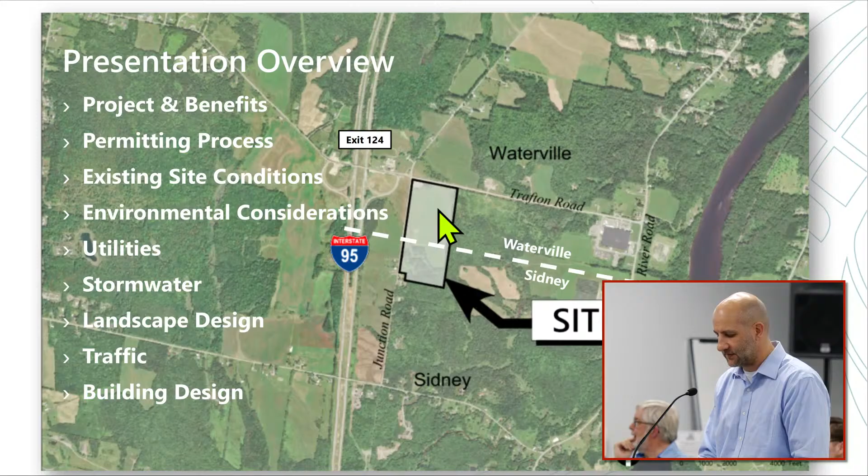The presentation tonight covers a number of things: project benefits and overview, the permitting process—so you can see where we're at, since this isn't the only permit for the project, there are quite a few—existing site conditions, environmental considerations, utilities, stormwater design, landscape design, traffic, and the building.

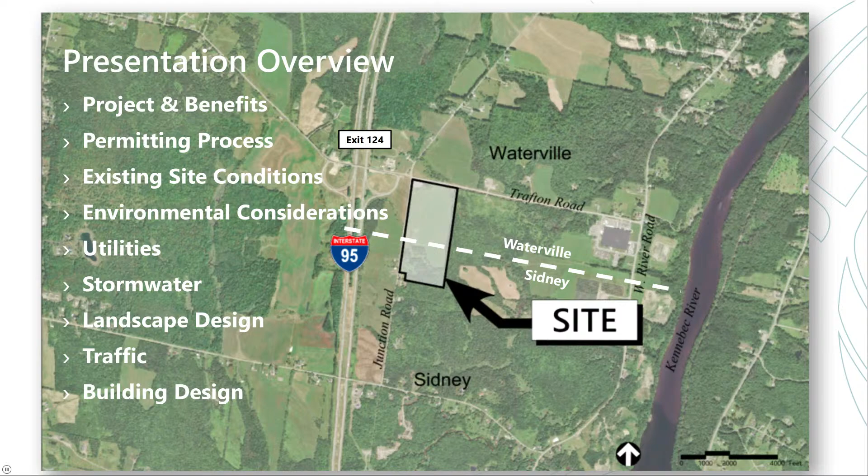They come via 95, entering this facility immediately at the interchange at 124, coming down Trafton Road onto Junction and into the green driveway on the north side of the facility. That green driveway provides access to 20 truck spaces on the back side of the facility, 15 of which are loading docks. There's also an employee parking lot shown in blue.

The pink area to the south of the facility is where the vans that deliver product will be parked, queuing and loading at the south edge of the building. That south edge has a canopy over the top to allow product to come in and be distributed out under cover. The facility is located right at exit 124, and we're targeting a 2027 opening date.

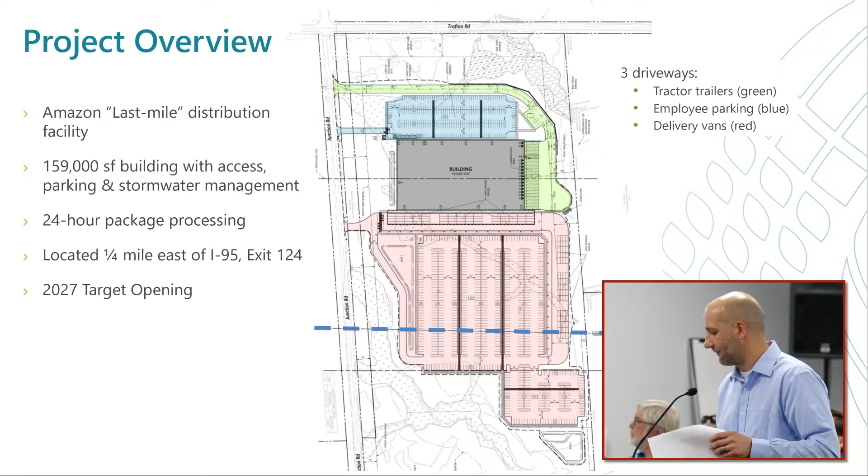Some aspects of the project: this is a site that's been zoned this way for quite some time with the intention and desire to have industrial use. It meets that category in the commercial district zone. The idea behind some of the investment at Exit 124 and the zoning of these parcels back in the late 80s was to promote this type of development. It's been under that zone since 1987.

In 2018, the interchange on 95 was put in to further promote the exact connection to the interstate. The project will support approximately 150 to 200 full and part-time jobs, and certainly provides expansion to the local tax base, providing municipal tax revenue.

Some infrastructure enhancements as part of the project, even though it's not an aspect of the traffic movement permit - the desire we've heard from folks both here in the Waterville process and in the Sidney process was not just to pave a little bit of Junction Road, but to pave the whole length into Sidney. So from Trafton Road all the way down to Town Farm Road, the project will pave that to improve that connection. There's also an extension of water along Trafton Road and three-phase power. I'll show you that in a moment.

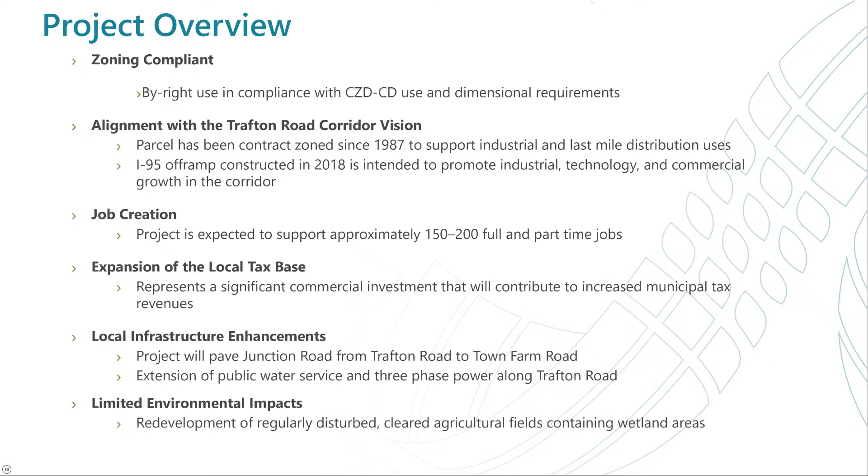As far as environmental impacts, we've really focused the development in an area of developed field, and I'll show you that in more detail, so that we limited any areas that haven't been previously disturbed. We really focused it on the field area that is regularly cultivated.

As for the permitting process, we are in front of you tonight for final review. Sidney has a review coming up on the 15th for their final review process. This project requires we go in front of the Maine DEP for site location of development, since it's over 3 acres of impervious area. We made that application on April 24th, and it was accepted by the DEP for processing on May 15th.

As part of that, there's a Natural Resources Protection Act, and ultimately there's also what they call the Maine Construction General Permit that we'll be going through as part of the erosion and sediment control and contractor requirements for the site. Because of the wetland impacts, we also have an Army Corps of Engineers component, so an individual permit went into the Corps. That's being processed as well, typically a simultaneous review with the DEP.

They've attended those meetings jointly, the DEP and the Corps together, to look at this, and they've also met us in the field to do wetlands evaluation certification.

And then there's a traffic movement permit. Of course, this project does generate traffic, and it has a permit that was submitted to the DOT. A scoping meeting was held on May 26th. We're going through that process right now with the DOT and hope to get that permit issued in the coming couple weeks. Building permits would be a future phase, probably Q3 of this year.

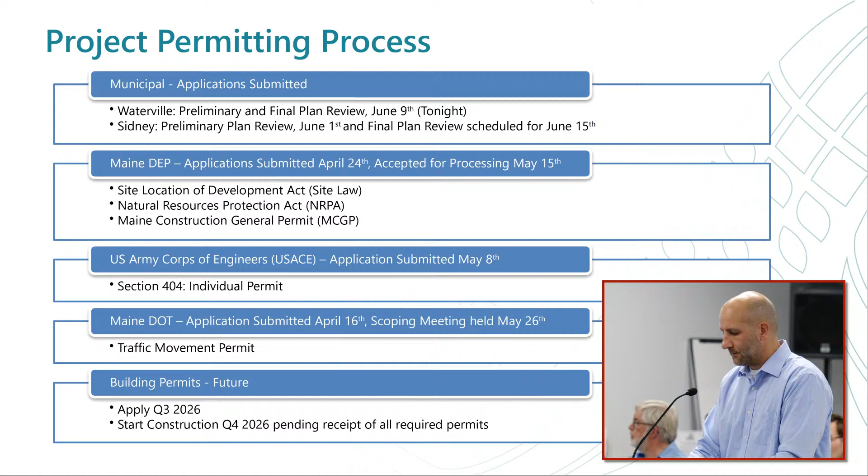As a site overview, it's approximately a 47-acre parcel that straddles the Sidney-Waterville line at the corner of Junction Road and Trafton Road. In Waterville, it's the contract zoning district, commercial district zone. In Sidney, it's the general district. Both allow this type of use that has been proposed on those parcels in those towns.

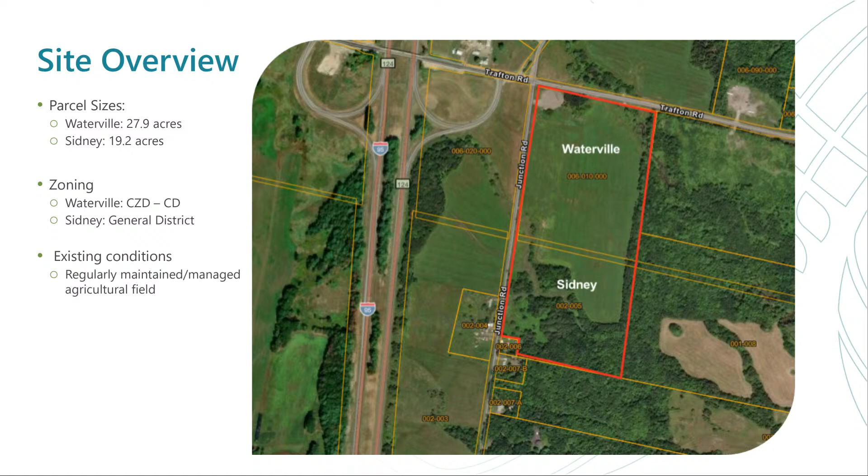As for existing conditions, like I mentioned, it's a regularly maintained field. It's important to recognize that the development has been almost entirely focused on the area that's been previously cleared, so there's very little clearing associated with this.

As for site layout, I already talked a little bit about how the site functions. We went through the Waterville requirements for both use and dimensional requirements, and it meets all of those. It far exceeds most of those dimensional requirements, so all of them are met and exceeded.

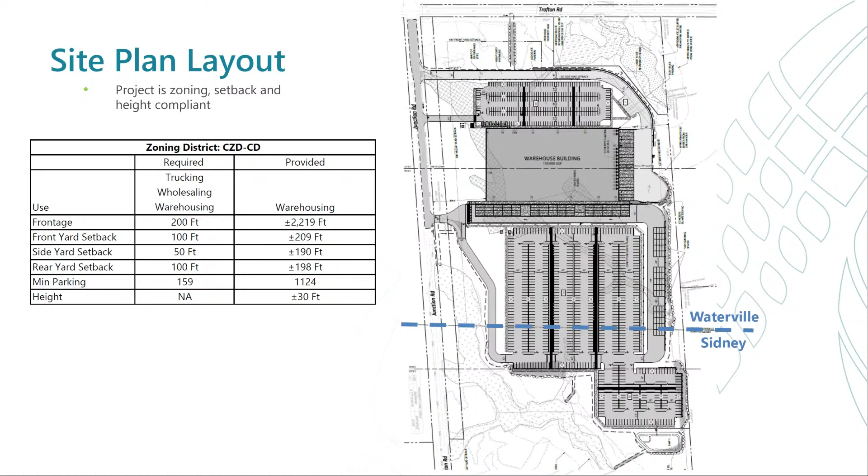Those streams we have largely avoided, staying out of their DEP required setbacks for the northeast corner, wetlands of special significance area. We're fully outside of that zone for our impacts.

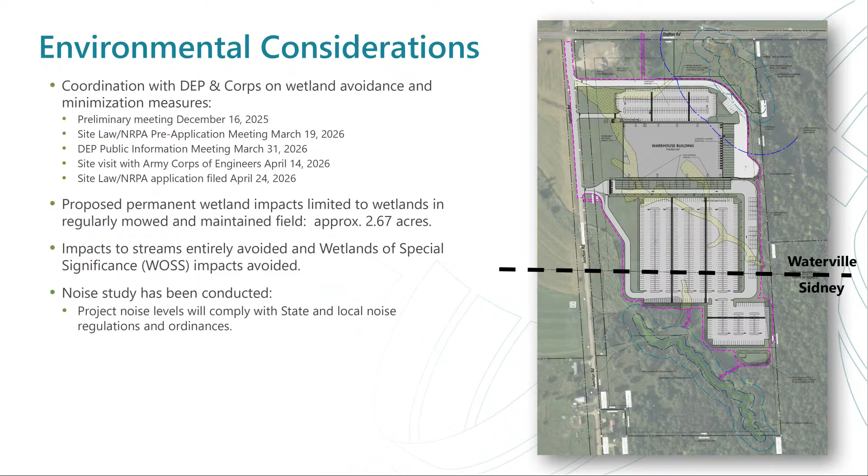The areas we do impact, 2.67 acres of wetland fill, are meadow wetlands within that cultivated field. For somebody like myself, it'd be hard to even tell the difference between that and the areas of grass. It really comes down to the hydric soils and the nature of the plants that wetland scientists are able to determine with the Corps and DEP.

But there are wetland impacts noted within that field area, and compensatory mitigation will be part of that. An in-lieu fee payment will be made by Amazon to the Department of Inland Fisheries and Wildlife, to be used for future wetland creation in other areas.

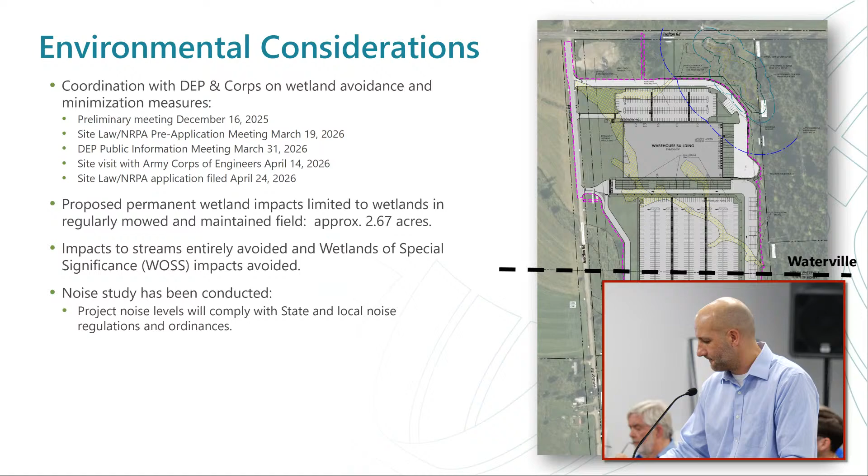Moving to the next slide, utilities: there is a public water extension that will service both this project and other projects that may choose to take public water along Trafton Road. That's 3,100 feet of new water main, probably a 12-inch line.

We've been coordinating that and will work through the process of installing that line and coordinating with the DOT on Trafton Road. Central Maine Power will be extending three-phase power, which is currently just single-phase in this area. That three-phase power will come from the West River Road area, where it currently terminates, and extend 4,200 feet up to Junction Road and then down Junction Road to service the facility.

For natural gas, we'd be taking a service from Summit Natural Gas, which is right there on Trafton Road. Telecommunication extensions will just be provided by the carriers on that CMP infrastructure.

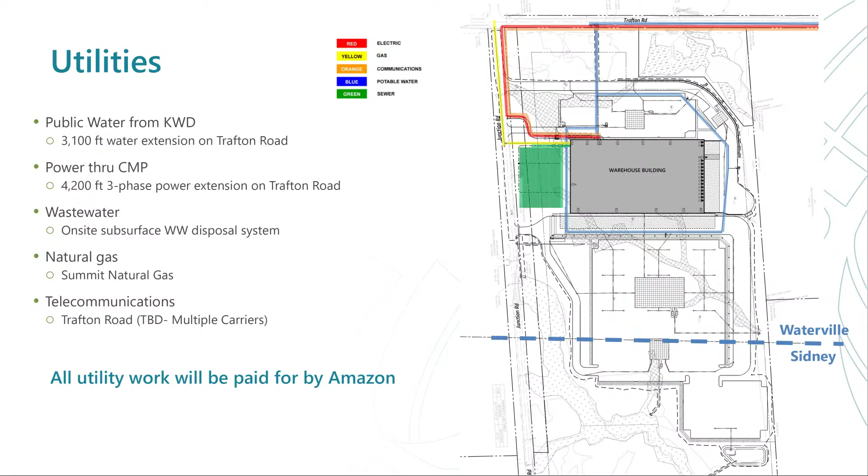Stormwater, which is an incredibly important aspect of a site like this, needs to be managed under the DEP's strictest standards for site law, Chapter 500. This includes the basic, general, and flooding standards. Basic standards are erosion and sediment controls, and general standards are the finished water quality.

Once the facility is in service, how are you treating the water over its lifetime to make sure that water quality meets the DEP's thresholds? Then there's a flooding standard, meaning in the post-development condition, the water sent off the site can't exceed the pre-development condition under various design storms—the 2, 10, and 25-year, 24-hour storms.

To manage that on a facility like this, you need some form of detention, and we're doing water quality filters on each detention area. What you see in blue: there are a couple north of the building, one large one in the middle, and another blue area to the south. Those are subsurface storage facilities below the pavement. Following those, water goes through a water quality filter and then out to the resource. One surface feature we have is an under-drained soil filter on the very south portion of the site, which I'll show you in a moment.

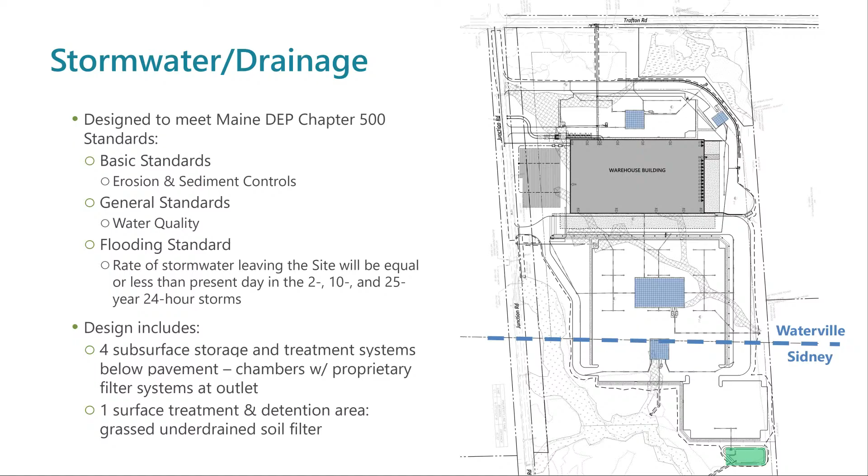So we have a strategy that looks at the hydrology across the site in the existing condition, asking where the water flows over the land right now. We want the water flow in the pre-development condition to match the post-development condition. So we've broken this up looking at the natural condition—there are 3 drainage points at the property line.

The drainage point in the northeast corner is again at that beaver impoundment. In the central area on the east side of the site, it's from those field wetlands heading to the property line, and that converges just off page with drainage point 1, and then eventually down to drainage point 3, which is the stream on the south.

We've matched more or less the same contributing area in each of those 3 locations for our discharge points, so that in the 2, 10, and 25-year storm, we end up with a near or lower peak flow condition. So we're always lower than the pre-development condition, but we also maintain the hydrology. In other words, we're not just sending all the water to one spot and not to another.

The other thing to consider is that soil filter on the southern portion of the site in Sidney, just below the parking lot. That's about a 2-foot depression, and I put a similar picture right there. We do have a chain link fence that is at the base of the facility there, but it's not a wet pond. It's mostly dry, and it's only a couple feet shallow, so it's not so much of a concern for exposure from that perspective.

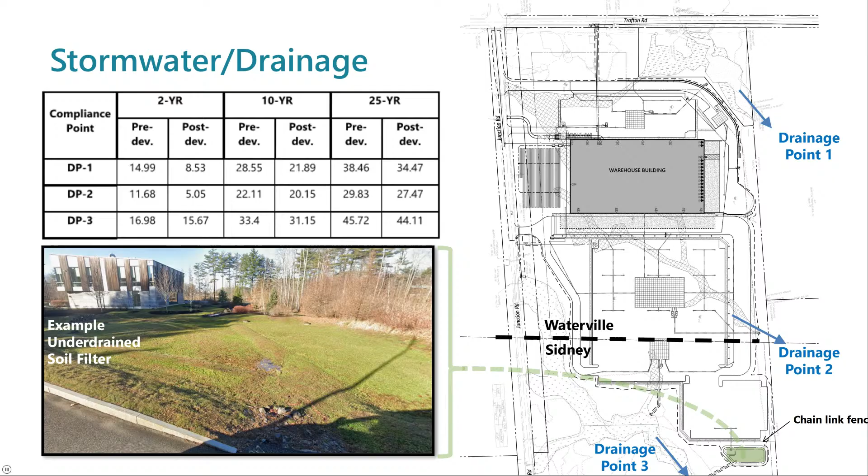Landscape design, we've got a mix of trees that we're proposing, up to 100-plus trees along that frontage of Junction Road, and then trying to maintain the existing trees that line Trafton Road. There's a tree stand up there between Trafton and the facility. And then on the south, there's wetlands and some trees, and it continues this. We didn't have more survey below that, but basically, we're going to have trees along the edge.

We did hear a concern about having certain species of oak that have some susceptibility to infestation, so we've changed those out to disease-resistant American elm and a black tupelo species of plants or trees in lieu of those oak, per the request of the board in a previous meeting.

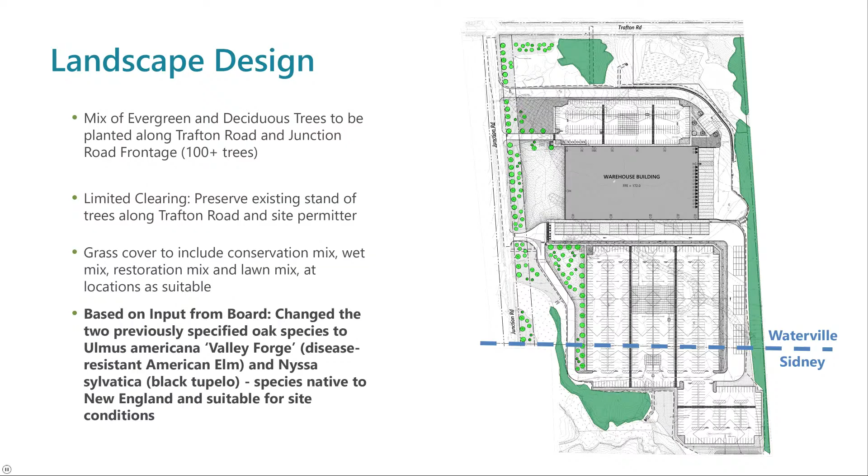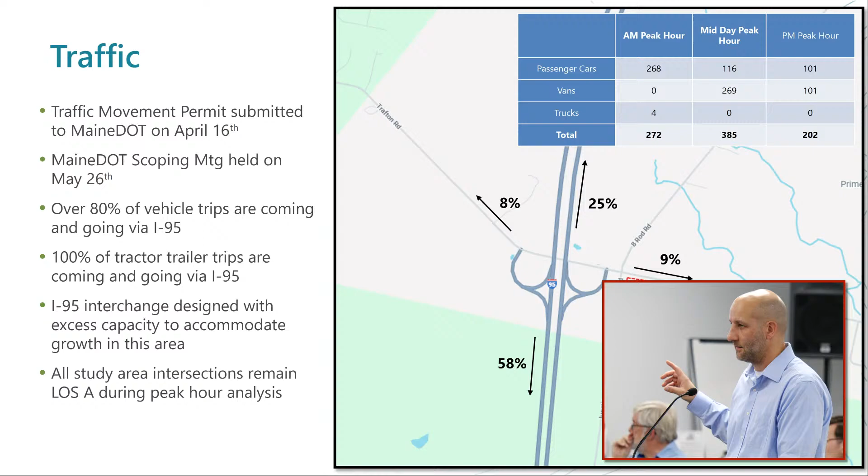And then traffic. Certainly, a number of questions have come up in previous meetings about the traffic from the facility. One key thing to note in the overall distribution of where traffic goes to and comes from, 83% is forecast to come off of the highway or go to the highway for this facility. So 17% hits the local roadway distribution. That means that really most of the traffic is there within that quarter mile at the interchange to the site.

The other traffic distribution, like we said, it's 8% heading out Trafton Road to the west toward Oakland, 9% heading in toward Waterville on Trafton, but most of the traffic to and from the highway. All of the tractor trailers are going to be to and from the highway. None of those should be going out onto the local roads.

And then in all cases, the level of service A during peak hours was maintained. This has a lot of capacity, and it was built for that. So even in the post-development condition, we're still at a level of service A on all of our study area.

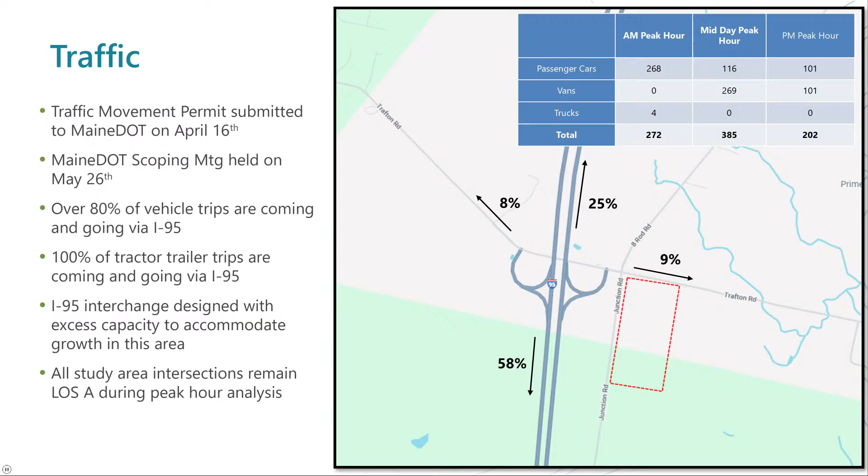But with that, we meet with the DOT, of course, and go over various things like, are there certain areas of concern, high crash locations, areas where traffic is not moving as desired. And we came up with a number of things that we feel are going to be improvements to the site and nearby to the site. Certainly an overhead lighting configuration at Junction and Trafton to be able to manage the traffic that's going to go through that intersection. But also an all-way stop at Trafton and West River Road.

I'll show you a diagram of that. Currently, it's just a single-way stop, so where Trafton meets West River Road, you stop, but West River Road, north and south, is a through road without a stop. We're going to propose a 3-way stop there. And then we're going to provide contribution for brush clearing.

The high crash locations are primarily related to deer crossings, both on the highway and on Trafton Road. So the DOT takes in a contribution to help with their funds for clearing back their right-of-ways and trying to keep it more visually clear and to keep deer from being right along the edge. They, of course, still cross, but it gives a lesser likelihood of them hanging right next to the edge of the road. And then we're going to pave Junction Road between Trafton and Town Farm Road.

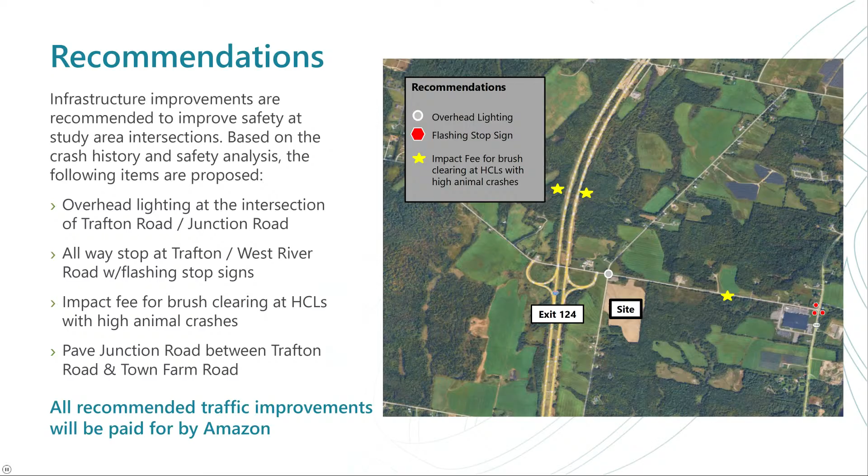There's also some signage-related improvements that are being discussed and negotiated with the DOT, along with some enhancements at the interchange for some of their control systems.

Junction Road at Trafton, shown on the left, has to be widened out to accommodate tractor-trailer movements. Heading north on Junction at that intersection, there will be a 2-leg intersection with left and through-right lane dedication. This requires pavement and widening improvements, along with overhead lighting to provide visibility at that intersection.

Trafton and West River Road will have a 3-way flashing stop configuration to provide safety improvements, because it's currently a 45 mph road going through north and south on West River Road.

Now, building appearance. The key on the lower left shows the vantage point, with the arrow pointing in. This is looking at the northwest corner of the building from Junction Road, toward the facility. It's a bit cold-looking due to the lack of vegetation, but there will be trees along the roadway. The building itself is simple—a painted concrete panel finish, approximately 30 feet high. The finished floor of the building is about 8 feet lower in elevation than Trafton and Junction, so it doesn't have prominence at the intersection, which is also set back quite a ways.

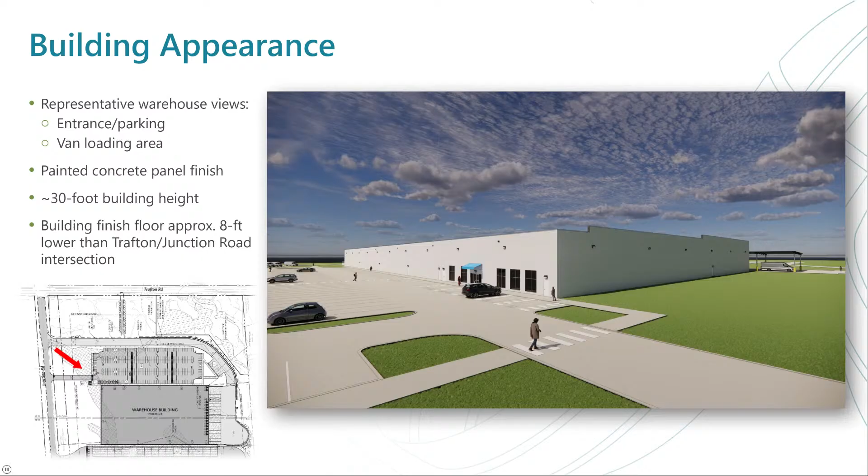There's one more slide showing the vantage point looking up from the south and west, toward the southwest corner of the building. That's where the canopy is for loading the vans. So that's the visual appearance of the south facade of the building.

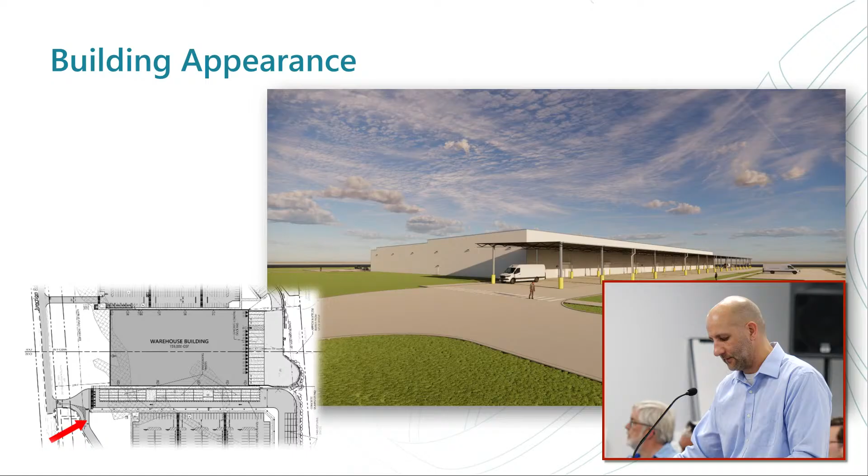That concludes our presentation, but we welcome any questions you have. I'll go back to the slides and bring up anyone who might be more of an expert than me on a particular topic.

Thank you very much. You may not know that Waterville is the Elm City, so I like seeing the elm trees. That's a nice coincidence.

Are there any questions you have about all of the conditions that have already been placed on the findings and facts by various groups—the city engineer, the fire department, the water district?

The only question we had was about the request to pave with the heavy-duty pavement section for Junction Road, which makes sense. We would look to apply that to the areas where we're going to have heavy truck traffic, but request to utilize the city's standard paving requirement elsewhere, and similarly in Sidney for that roadway, since no tractor trailers are on it.

Do you know what the proposed road standards are in Sidney? It was brought up in our latest meeting—I think they just updated them, and they were going to send them over, but I don't have them yet. Sidney was saying they thought their road standards were more stringent than ours.

I'll jump in here. Andy sent us an email clarifying a question on that, so thank you for coordinating that, Ann. We are good with the condition as written—he clarified what the city standards are in terms of pavement sections. Everywhere has different definitions of what heavy duty means, but we understood what Waterville means, and we're accepting of it.

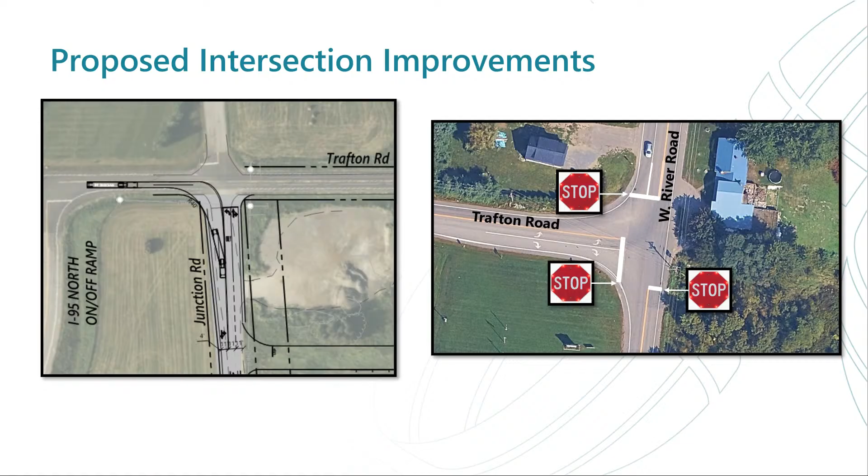I think what might have been referenced was these are flashing stop signs. They'll have a little solar panel and they'll blink, which gives additional perception for people, especially at night, because I was thinking traffic going at night, and I'm sure it's jet black in the middle of the night.

So there is no flashing light elsewhere down towards Junction Road or the highway? I'd have to go and look at what is existing there. I'm not sure what there is for existing flashing beacons. There's none proposed, so the only flashing mechanism would be the actual integration of that red LED around the perimeter of each stop sign. Thanks for clarifying.

Do you know if they're planning on reducing the speed on West River Road prior to the three-way stop? Was that discussed at all? It's 45 miles an hour there. It is, and that's kind of a different Maine DOT process for reevaluating speed limits, but it wasn't considered right now. I think the current Maine process, or you might be more familiar with some of the recent legislation that's come across the state on local control of speed limits, but that wasn't brought up as part of this process. Thank you.

Any other questions from the board? I had one question about the Kennebec Water District, they had mentioned the possibility of waiving the future collection of customer contributions to the water main. Is that something you guys are open to?

It's certainly something we're open to. We haven't been able to confirm as a team whether or not that's going to happen. I know it would be memorialized into that agreement, but we were not under the impression that had to be decided at this meeting. It's certainly something the team is open to considering.

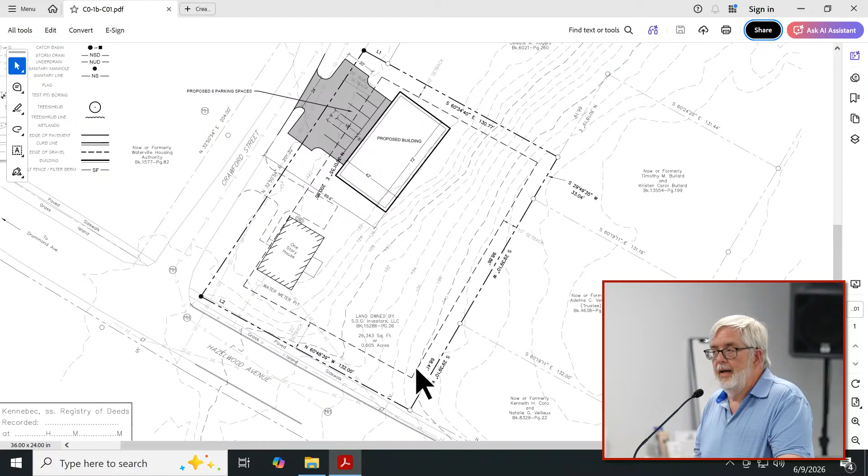We have letters from water, sewer, and the fire department that are all in agreement with this design. The fire department did review it after we rotated it around to this present configuration, and we're happy with that. They were happy with that.

So I think that's about all I have. We did look at traffic. It'll generate 3 new trips per peak hour, so it's an insignificant change onto Crawford.

And there were conditions, assuming you reviewed those and they're all acceptable? Yes, no concerns. Okay, any questions from anyone on the board?

Yeah, I have a question about the entrance into that parking area and the fact that there's quite a bit of pavement sitting in the right-of-way in addition to the driveway part that brings you in and out. Does that bring up any complications with grading and drainage, or is it all pretty straightforward?

It's a pretty flat site. Actually, this is an interesting site because underneath the public right-of-way, beside the road—this is the edge of Crawford here, between there and the property line—there's a 4-foot culvert. Apparently, sometime in the past, before it was not kosher to do this, there's a small stream that was captured into this 4-foot culvert, which runs through that area and then daylights on the other side of Hazelwood Avenue.

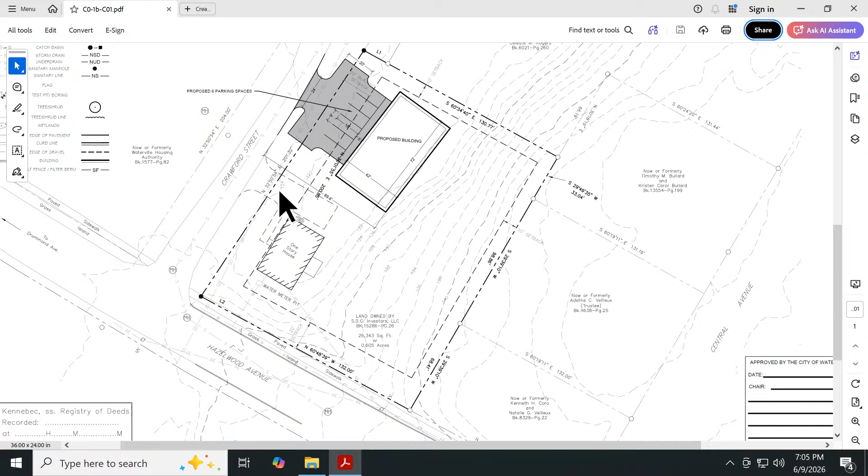That culvert also goes under the existing driveway to the home that's there now, so there's no way to access the property without crossing this large culvert. Who is responsible for maintaining that culvert? It would be the Public Works Department, I believe. It's part of the storm drain system for the community.

I also had a question—I'm assuming there's so much pavement there to add space for things like dumpsters and snow removal. Well, this one's actually just going to use purple bags put out on the curb, so we don't have a dumpster there.

The little wings on the side are so somebody can back out of a parking space and have a place to back before they turn out, preferably driving onto the street rather than backing onto it. A lot of times in a situation like this, you'd extend the pavement all the way to the street. In this instance, I wanted to create grassed islands so people would be encouraged to drive onto the street rather than back, just for safety.

Anybody else? No? Okay, anybody from the public?

Well, let me introduce my friend. This is Nathan Poley, who's our intern this summer. He's studying civil engineering at the University of Maine, and hopefully he'll be able to come back and do this in a couple of years.